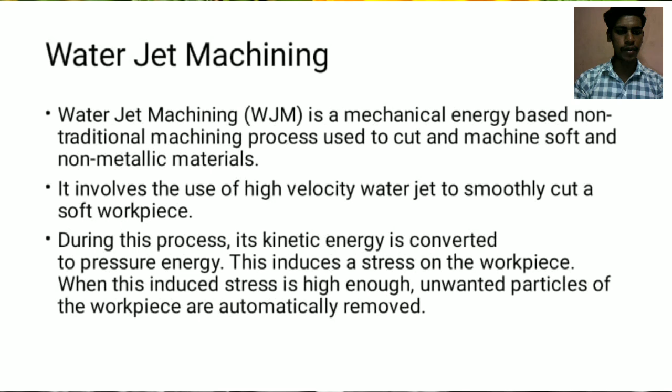Construction of water jet machining. The apparatus consists of the following components. Reservoir: used for storing water to be used in the machining operation. Pump: pumps the water from the reservoir.

Intensifier: it is connected to the pump and pressurizes the water received from the pump to the desired level. Accumulator: it is used to temporarily store the pressurized water.

It is connected to the flow regulator through the control valve, which controls the direction and pressure of the pressurized water supplied to the nozzle. Flow regulator: used to regulate the flow of water. Nozzle: it ejects the pressurized water as a high velocity water jet.

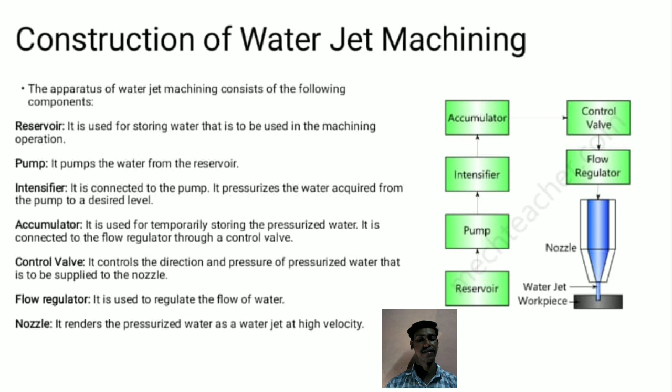Working of water jet machining. Water from the reservoir is pumped to the intensifier using a hydraulic pump. The intensifier increases the pressure of the water to the required level. Usually the water is pressurized to 200 to 400 megapascals.

Pressurized water is then sent to the accumulator, which temporarily stores it. The water then enters the nozzle by passing through the control valve and flow regulator. The control valve controls the direction of water and limits its pressure under permissible limits. The flow regulator controls the flow rate of water.

Pressurized water finally enters the nozzle, where it expands with an increase in kinetic energy. A high velocity water jet is ejected from the nozzle. When this water jet strikes the workpiece, stresses are induced, and these stresses are used to remove material from the workpiece.

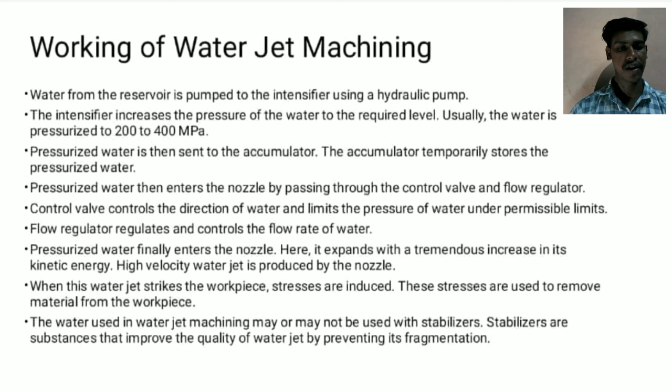The water used in water jet machining may or may not be used with stabilizers. Stabilizers are substances that improve the quality of water jet by preventing fragmentation.

Main parts of water jet machining. Water jet high pressure pump: various types of HP pumps are designed to provide sufficient water flow rates at a specific and consistent high pressure, to supply single or multiple cutting heads as required.

Water jet machine table and catch tank. The material to be cut is placed on the bed of the machine table, which has a water-filled catch tank. The length and width of the table generally determines the maximum travel of the XY motion control system, which establishes the cutting window or largest workpiece for the specific table. Our selection of water jet machining systems includes cutting windows from 4 by 8 feet up to 12 by 18 feet.

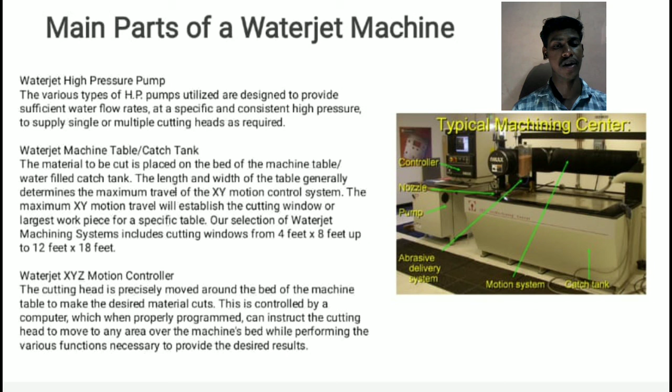Water jet XYZ motion control: the cutting head is precisely moved around the bed of the machine table to make the desired material cuts. This is controlled by a computer which, when properly programmed, can instruct the cutting head to move to any area over the machine's bed while performing the various functions necessary to provide the desired cut.

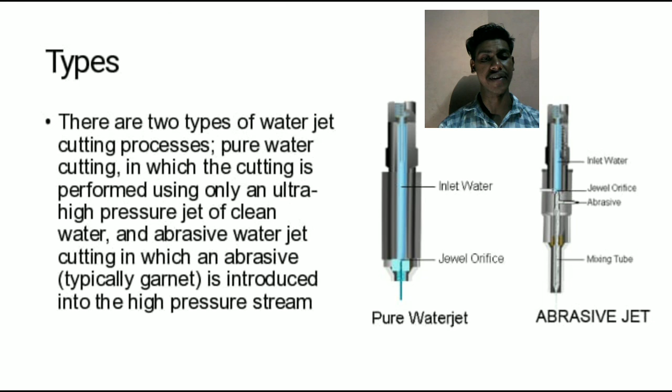Types of water jet machining. There are two types of water cutting processes. Pure water cutting, in which the cutting is performed using only an ultra high pressure jet of clean water. The other is abrasive water jet cutting, in which an abrasive is introduced into the high pressure water jet.

It is an extremely versatile process. Heat is not generated while cutting, and it does not have mechanical stresses. Abrasive water jet machines have thin streams and are applicable in both thin and thick material cutting.

In this water jet machine, there will be a rapid switch between abrasive and pure water jet cutting.

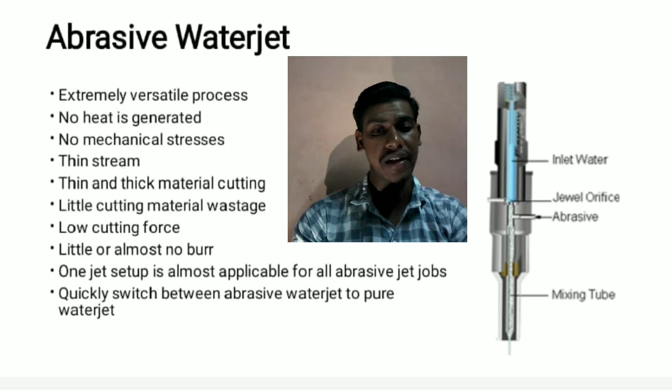Pure water jet: the water stream is very thin, and there will be little wastage material while cutting the metal. During cutting, heat is not generated, and the method is relevant to both thin and thick materials.

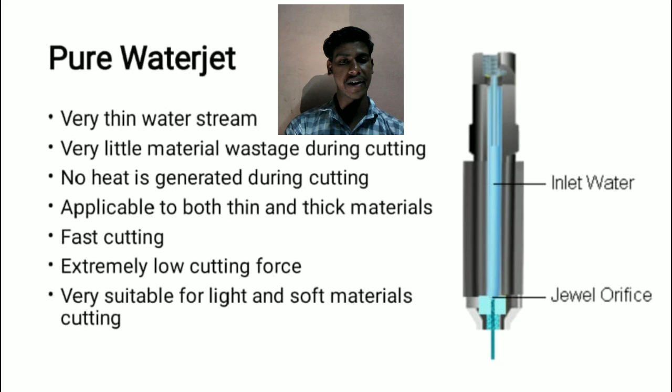This system provides fast cutting, with an extremely low cutting force. The machine is exactly suitable for light and soft material cutting.

Applications. Water jet machining is used in various industries like mining, automotive and aerospace for cutting, shaping and reaming operations. The materials commonly machined by water jet are rubber, textiles, plastics, foam, leather, composites, tile, stone, glass, food, metals, paper and much more.

Water jet is mostly used to cut soft and easy to machine materials such as thin sheets and foils, wood, non-ferrous metallic alloys, textiles, plastic, polymers and leathers. Abrasive water jet machining is typically used to machine materials which are hard and difficult to machine.

It is used to machine thick plates of steel, aluminum and other commercial materials, reinforced plastics, metal matrix and ceramic matrix composites, layered composites, stones and glass. Besides the machining process, high pressure water jets are used in paint removal, surgery, cleaning, and removing residual stress. Abrasive water jet machining can also be used to perform drilling, pocket milling, turning and reaming.